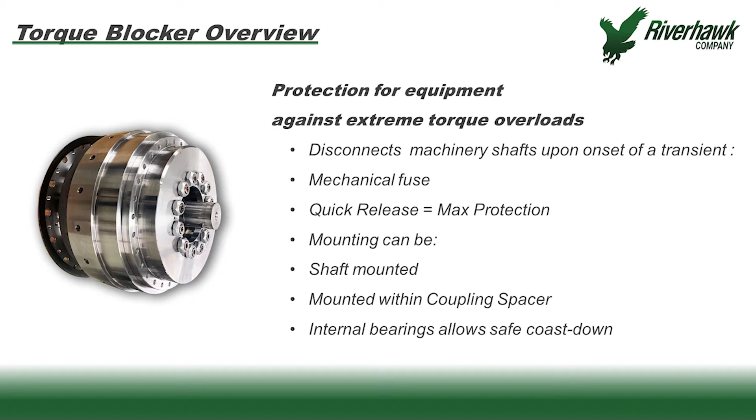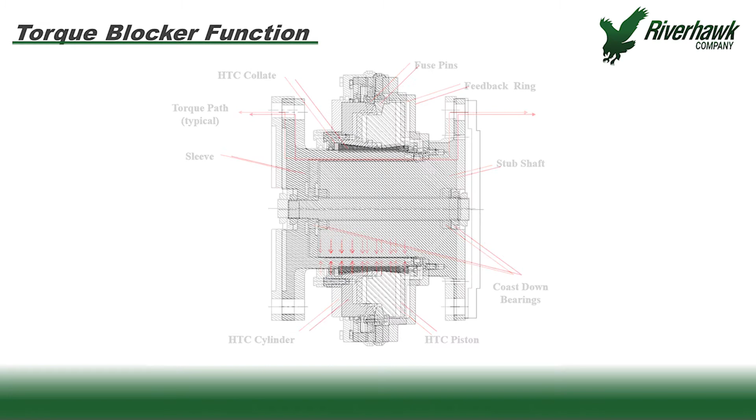This view shows the torque blocker in the activated condition. The red arrows at the top show the torque path when activated. It's important to know that torque and speed can go in either direction through the torque blocker, and protection is bidirectional as well.

For discussion purposes, let's assume that the driver is on the left. Torque enters the left flange, travels radially down to the sleeve, runs along the sleeve, and then crosses inwardly to the stub shaft. The torque then travels along the stub shaft, up the right flange, and into the load machine.

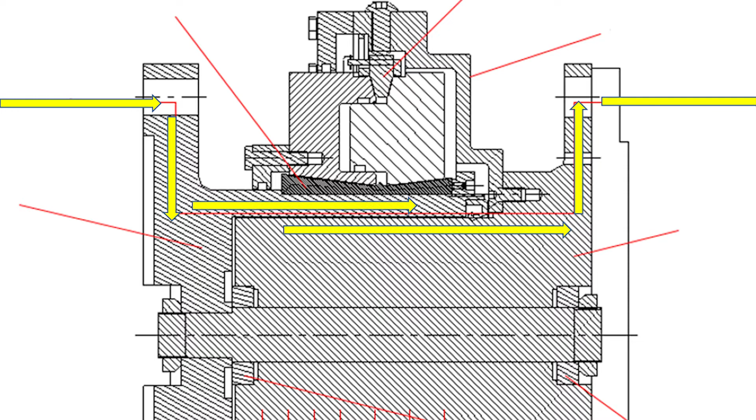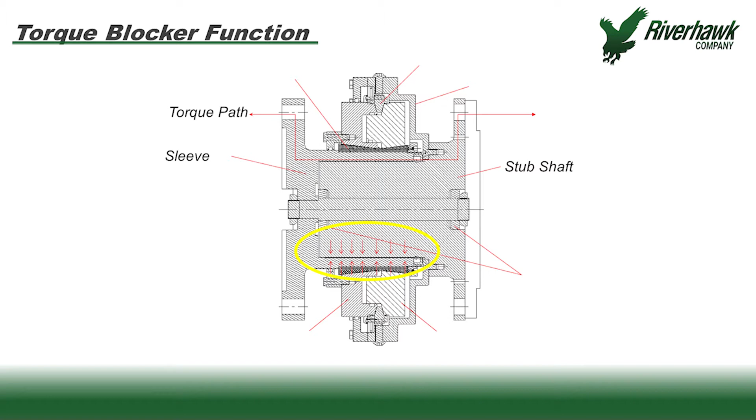The critical connection within the torque blocker is the fit between the sleeve ID and the stub OD. When activated, the sleeve is firmly pressed against the stub OD to generate a precise amount of friction that controls how much torque can be transmitted. When deactivated, the sleeve springs to its free state, where a gap exists between the sleeve and the stub surfaces, making them able to rotate independently.

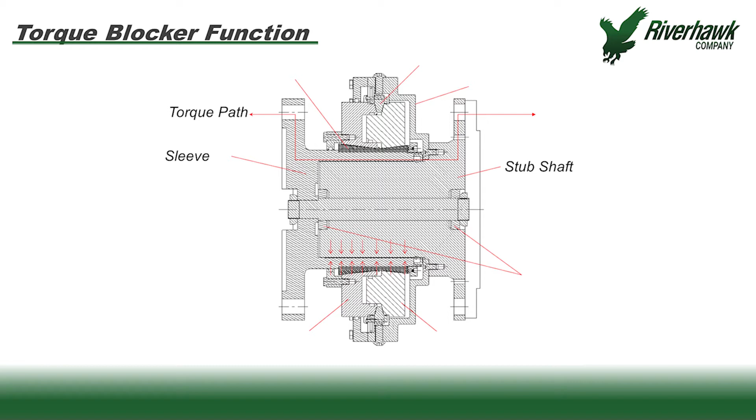The tight grip that is so important to the torque blocker's ability to transmit torque comes from the hydraulic clamp, which is depicted here as three parts: the HTC piston, the HTC cylinder, and the HTC collet. This assembly is based on the Riverhawk hydraulic torque coupler product, which already is in existence and is established as a powerful way to make shaft connections.

Two key subassemblies are the fuse assembly and the coast down bearings. The fuse assembly consists of a series of radially located fuse pins and the feedback ring. When the unit is activated, the fuse pins are firmly held between the tapers of the piston and cylinder by inwardly facing teeth within the feedback ring. As long as the fuse pins are held in place, the HTC retains torque capacity of the torque blocker.

When a high torque occurs, the feedback ring rotates slightly relative to the HTC, causing the teeth to disengage with the pins, freeing them to slide out radially and allow the HTC halves to unload and release torque.

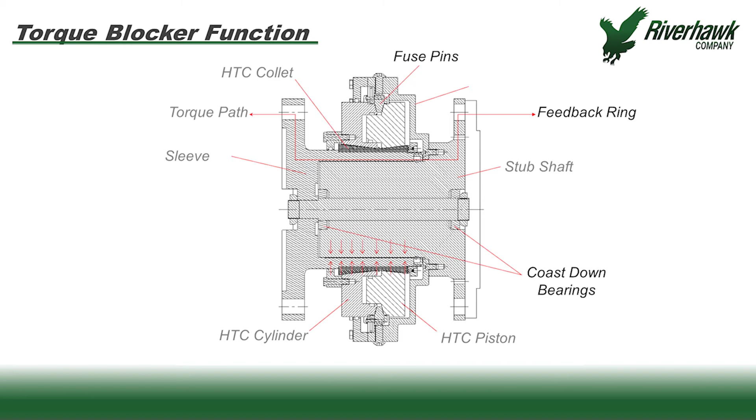Reset is accomplished by applying hydraulic pressure to the cylinder cavity, usually between 3,000 to 5,000 psi, and repositioning the fuse pins to the set position. The result is a hydraulically activated and mechanically retained assembly that is carefully calibrated to release only when an overload occurs. Sometimes a physical demonstration can answer a host of questions.

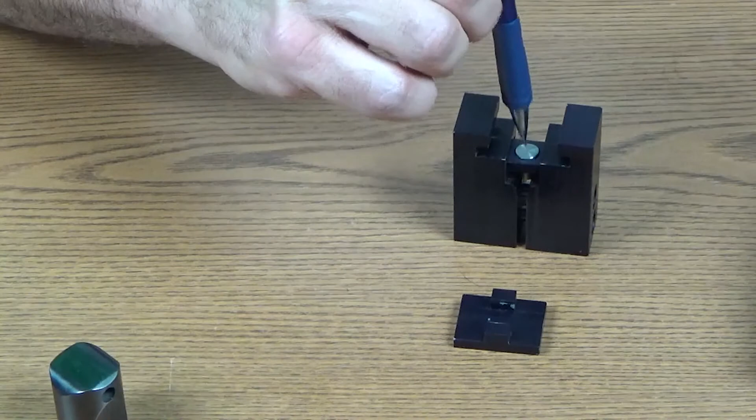So here is a handheld model of a fuse mechanism. We can partially take it apart to see the components. First, I'll drop the pin down in. Let me take the slider off, and you can see a couple of very important parts. You can see the top of the fuse pin, the shiny part, and you see these teeth. And then you can also see how the fuse pin sits down inside the tapers. I'll slide it back and forth a little bit so you can see how it slides in and out.

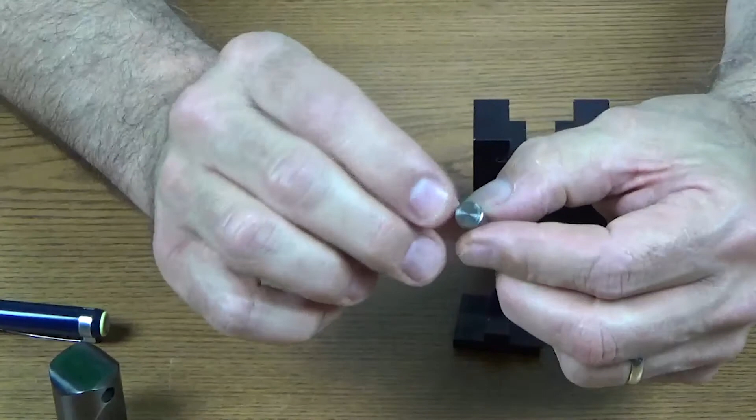We can take that fuse pin out. There is the fuse pin. You can see the tapered sides, the top flank. Here's a real fuse pin, similar item. This is out of a unit that's rated for 4.5 million inch-pounds. Similar design, a little more articulation on the top.

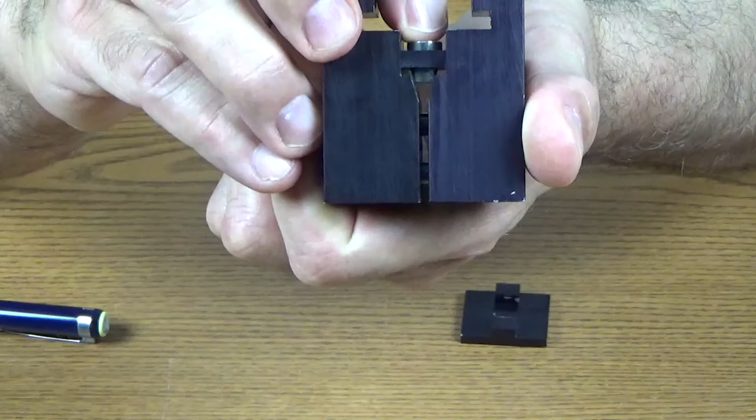Okay, so now we'll drop the pin back into the fuse mechanism. And you can see how, if I squeeze it, maybe you can see, let me get a little closer here. See how it slides up and down when I squeeze it?

Next, we're going to set the fuse pin by putting the slider back in and sliding the tooth over the fuse pin. So this is just like setting the unit. Slide that like so. Okay, now it's a solid assembly. You can shake it, move it around. This is the way the torque blocker is, the fuse mechanism in a torque blocker that's set.

So now what we're going to do is we're going to fuse this off. I'll apply pressure to the clamp pads, and I'll mimic the sliding of the feedback ring by sliding the slider. That is how the fuse mechanism in a torque blocker works.

Here are a few of the benefits of the Riverhawk torque blocker design. Torque blocker is designed and built to tolerate extreme torque events. There are no sacrificial pins or plugs to maintain or replace. Torque blocker is inherently resistant to high bending or high dynamic torque loads. There is no need to retain or seal high pressure oil within the torque blocker during operation.

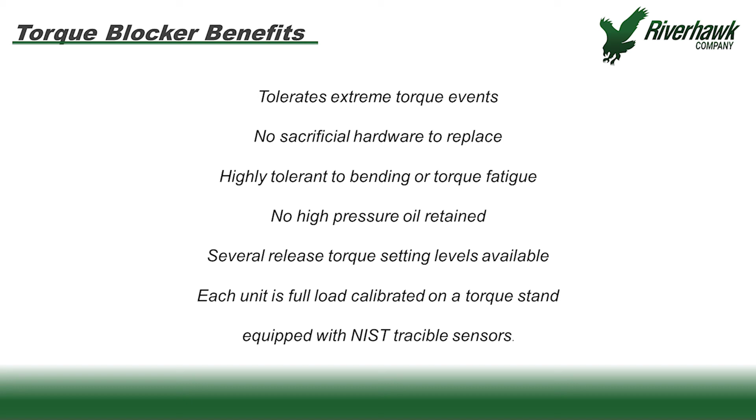Several release settings can be supplied, and each unit is full load calibrated on a torque stand that is equipped with NIST traceable sensors.